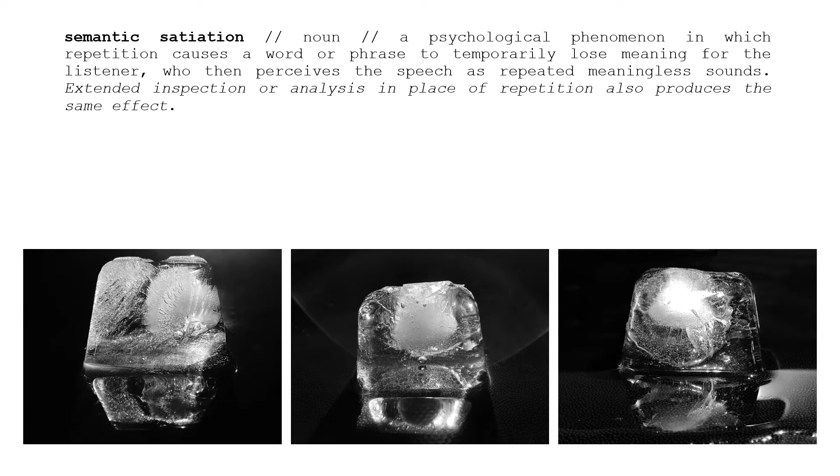Semantic satiation is essentially the repetition of a word which causes it to lose meaning to the listener. This also applies to extended inspection or analysis of an object. The definition says it becomes a meaningless sound or object, but for our purposes, I disagree. I believe semantic satiation is the key to discovering new meaning within the familiar.

Water is essential, the key to sustaining life. Yet in our everyday lives, it is severely underappreciated, treated as a nuisance, relegated to the gutters. What if we celebrated it instead? The goal of this proposal is to completely reframe our perception of water through design by making it the centerpiece of our everyday experience. Through acts of semantic satiation, ubiquitous encounters at both urban and domestic scales, the function and beauty of water are simultaneously harnessed and elevated.

Water is known by the ways it is shed and through artful acts of collection.

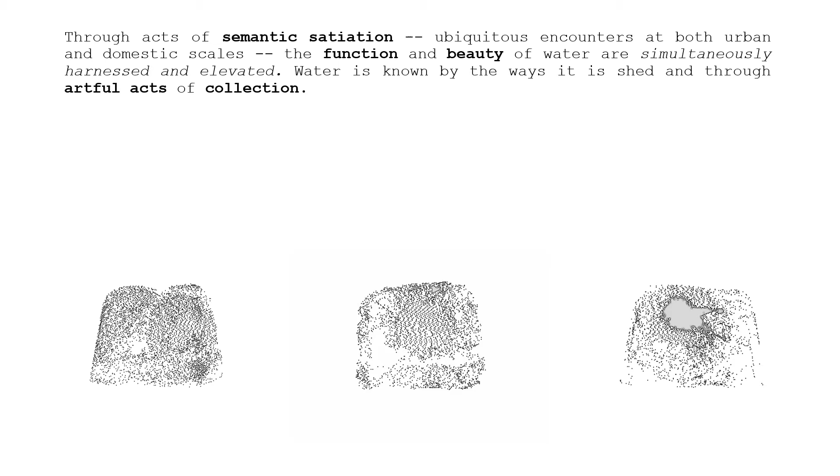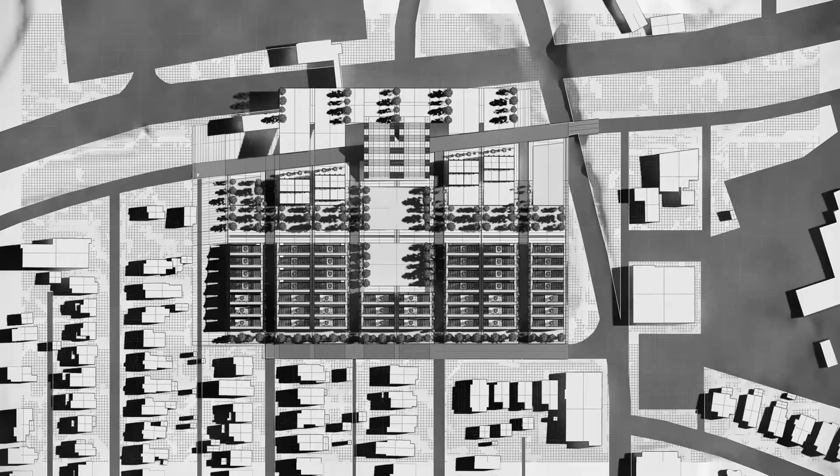Our site is located slightly east of Atlanta, Georgia, on the outskirts of Decatur within the parking lot for the East Lake MARTA station. The organization of this site plan and everything in the project from here on out is entirely based upon the previously existing site and the current existing surroundings. Straightening that curved road was the first step in restoring the urban grid.

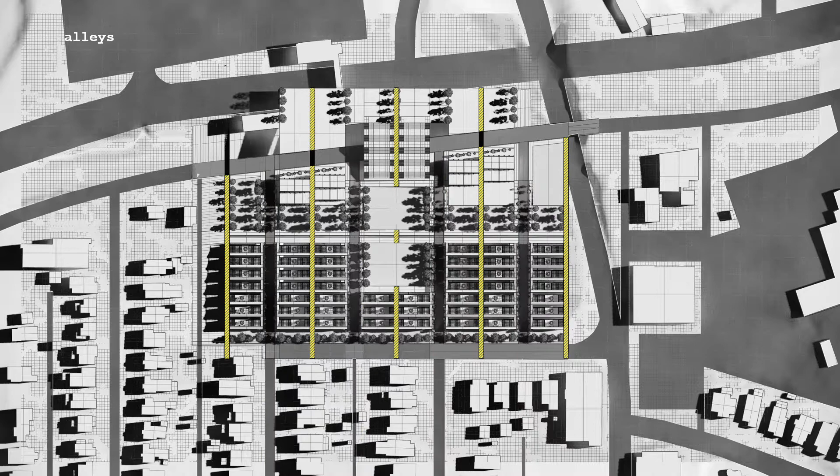This is College Avenue and runs parallel to the MARTA track. The road placements were formed by extending the existing roads and alleys within the southern residential space up into the site. This directly connects both the site proper and the surrounding area to the MARTA station. Pedestrian alleys were added in between because the housing will be denser within the site than the surrounding neighborhood.

A natural dip in the topography initiates a canal or valley to collect water for the public space. The newly straightened Park Place becomes the southern border of all the interventions. Altogether, you can see how the entire proposal conforms to its surrounds, restores the grid, and becomes its own unique logic in the process. This organization strategy will control the housing placement, road and alley systems, and most importantly, water collection strategies.

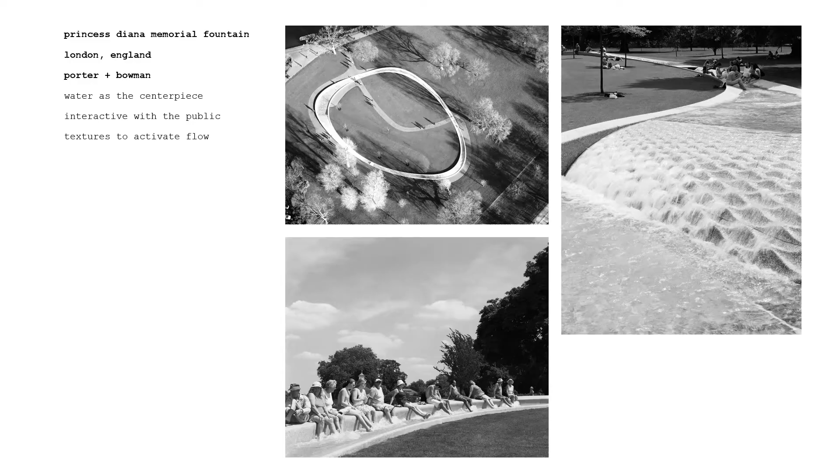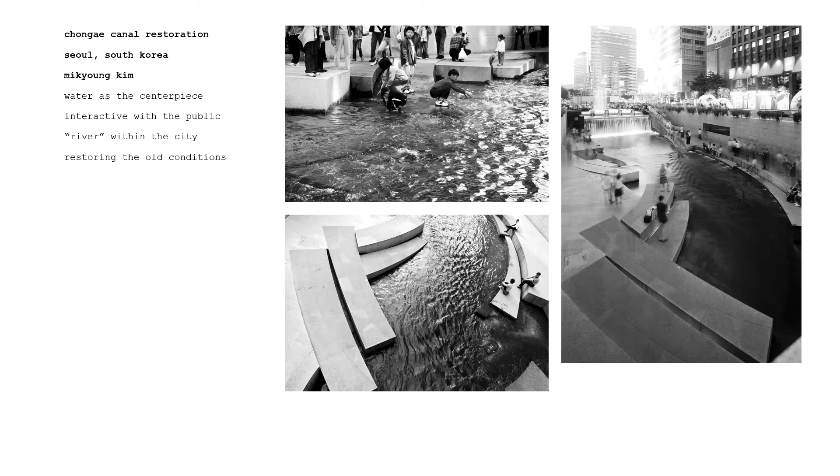On the topic of water, these two precedents have inspired the design strategies in this proposal. This is the Princess Diana Memorial Fountain. It uses water as the centerpiece, it's interactive with the public, and it uses textures to activate flow. This is the Chongae Canal Restoration Project. It also uses water as the centerpiece, it's interactive with the public, and it restores the city to its previous river conditions.

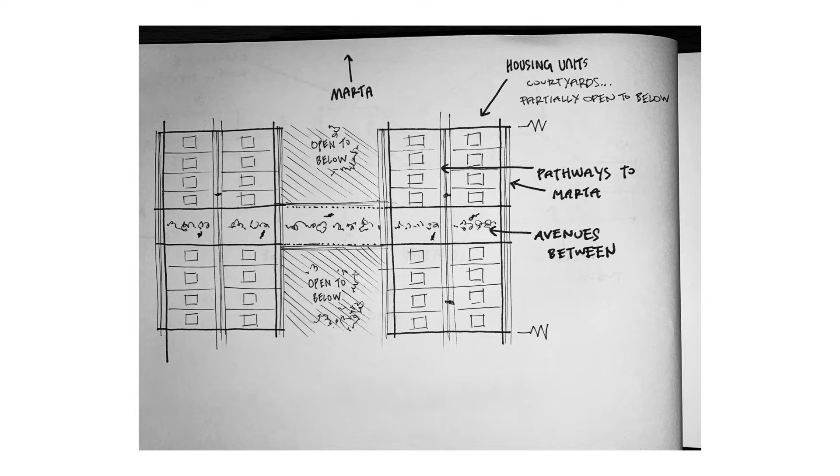Taking the design into 3 dimensions at an early stage was critical to developing a meaningful and consistent water collection strategy for the public space. From the beginning, there was an interesting interaction between north-south regulating alleys and east-west water collection valleys. The trick was to harness both of these forces in a cohesive way. This series of diagrams explains how the organization was brought into 3 dimensions.

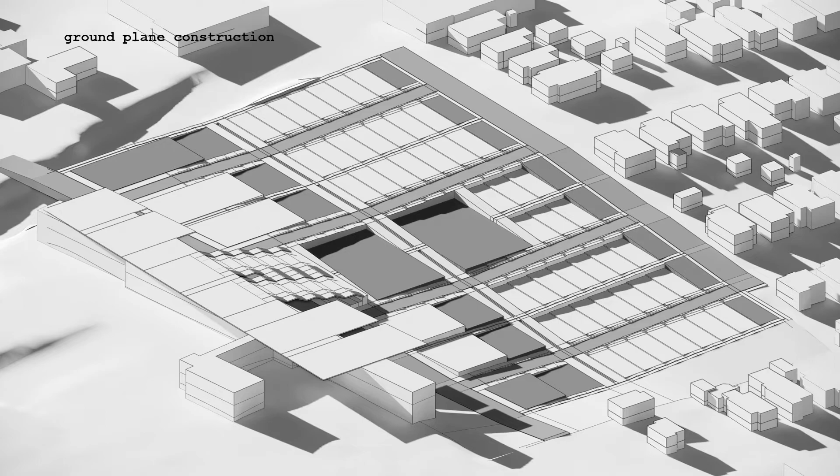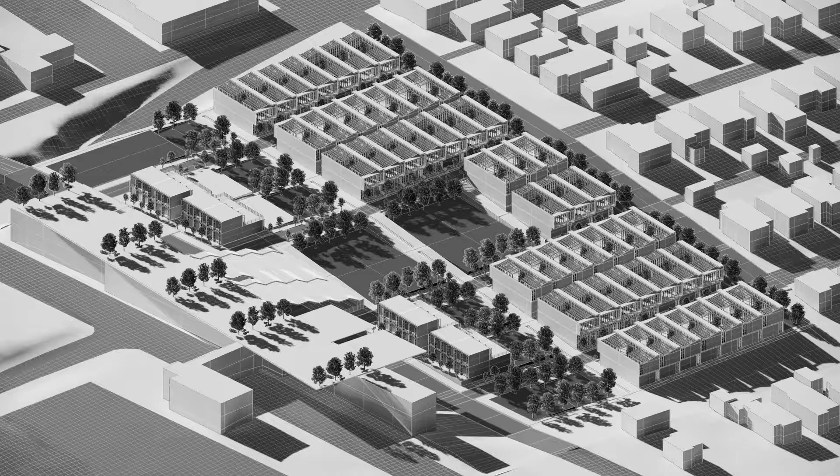And here's the site with the housing from a northwestern vantage point. Energy will be produced for each respective part of the site, the MARTA station, the shops, and the housing, from the solar panels on their own roofs.

Notice the green space is located along the central valley. The housing is located on the southern part of the site, directly adjacent to the surrounding neighborhoods. The housing with attached shops are placed closer to the public space and to the MARTA station.

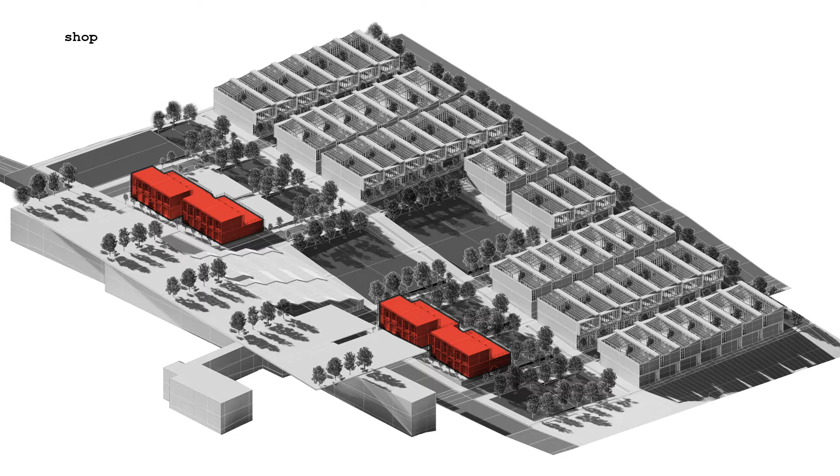These are the main shops, located along the roadway, College Avenue, and closest to the MARTA station. This is the performance space with a stage and slope seating extending over College Avenue. This could be used for things like concerts or sports events. On a terrace above the MARTA station, there will be courts for basketball or tennis.

Below the final water collection point will be a cistern, and this water will be showcased with a series of fountains and a splash pad.

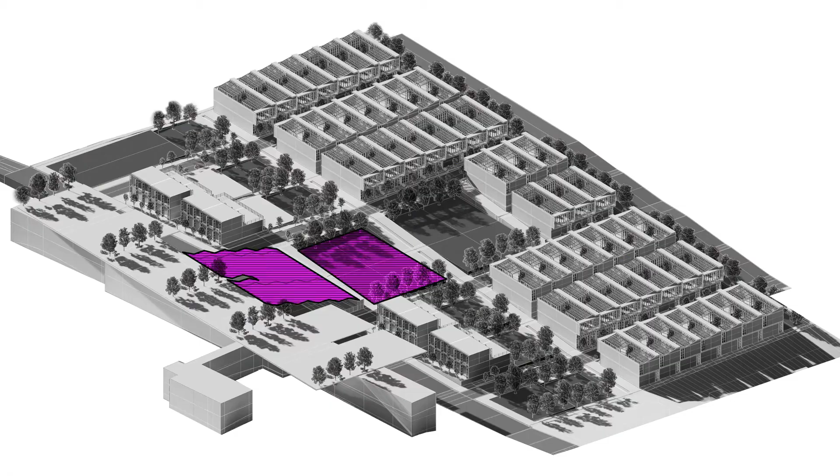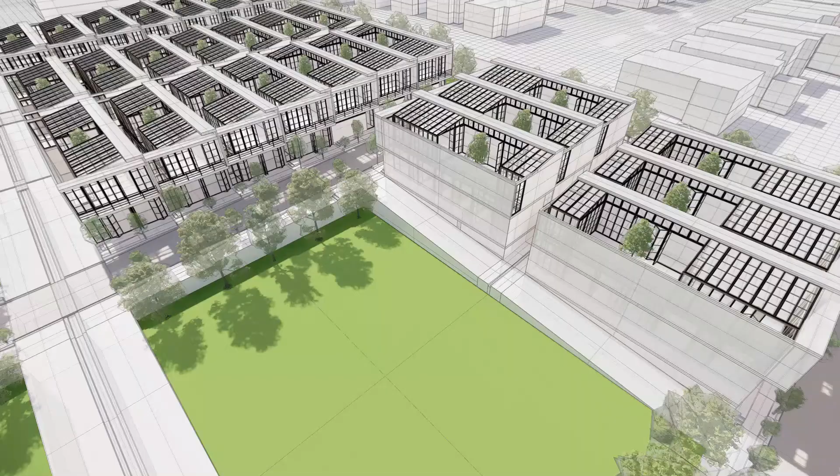Here's a view of the main green space overlooking the housing units. This view shows the stage, the seating, the access point for MARTA, and the terrace atop the train station. The water is activated by spilling off the edges of this terrace in an artful way, similar to that of the housing units. Here's an eye-level view on College Avenue, showing the covered bus stop and the shop fronts.

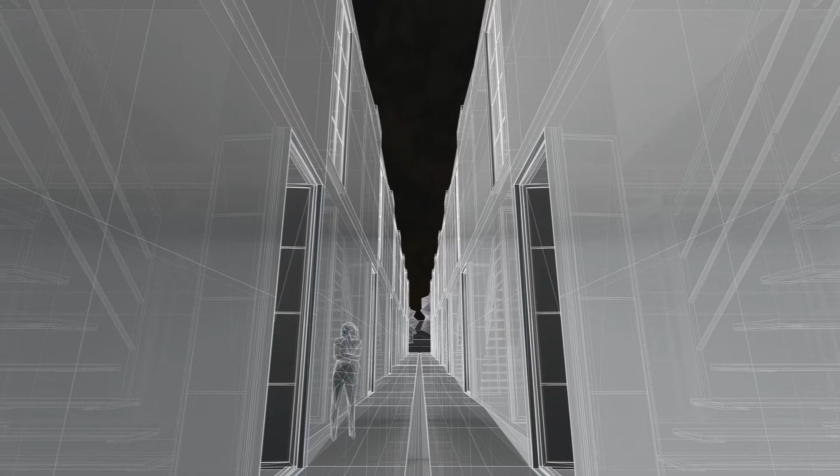This is the water showcase area, looking at the housing patterning. This view is looking down one of the alleys, which is where all the units have their main entrance, separate from the attached shops on the opposite end. Notice the channel for the water down the center of this alley.

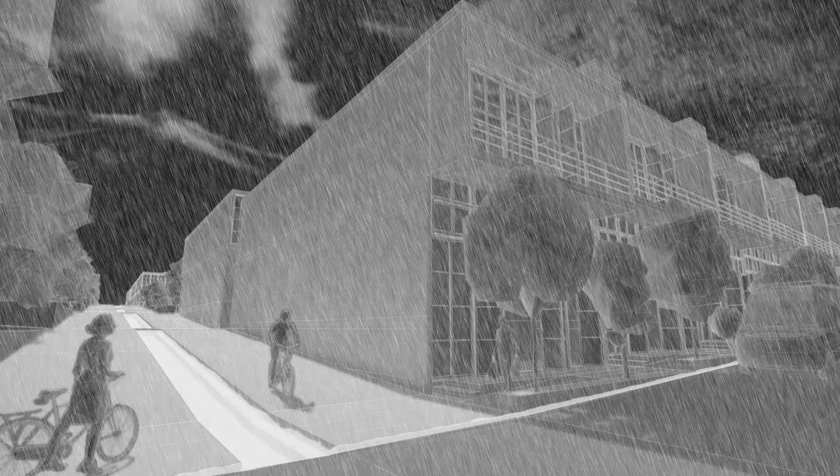This shows the corner of a street and the pedestrian canal space. The urban space is all activated by the water when it rains.

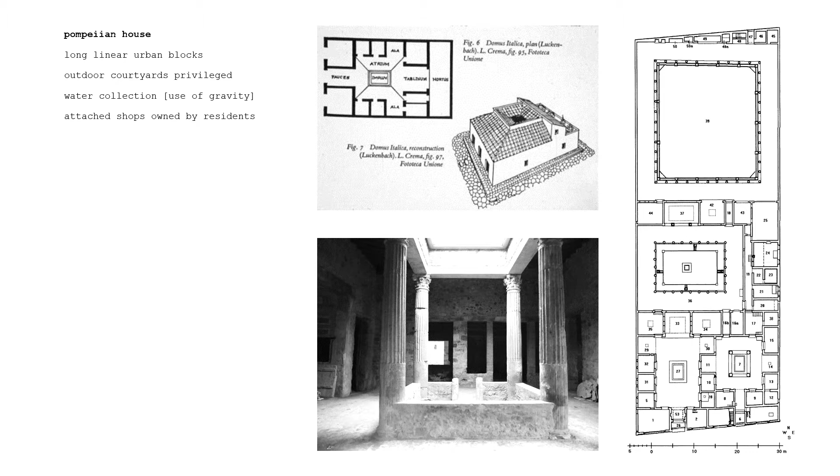As we move into the individual unit design, notice the alignment of the shop fronts along the public realm, all attached to their respective private units. The Pompeian house was a critical precedent because of its long linear blocks, outdoor courtyards, water collection, and attached shops.

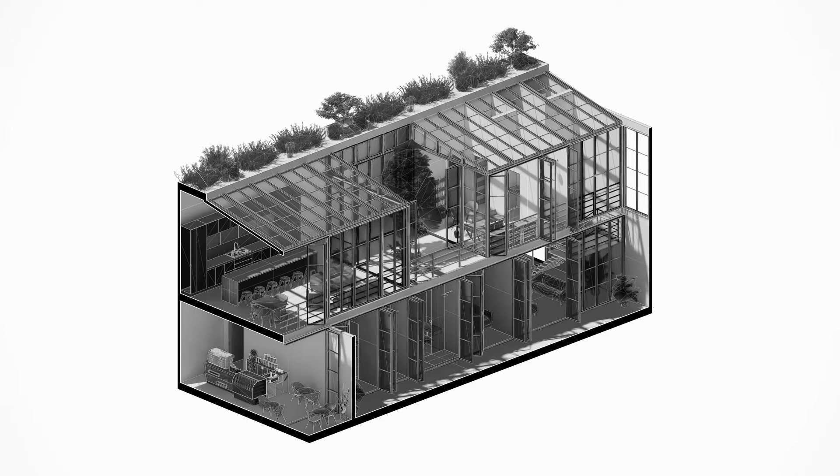This is a series of isometric sections. This first one is cut through the shop on the bottom floor and the main living and kitchen area on the upper floor. This is cut through the upper courtyard and the bedroom and bathroom spaces on the lower level. This third ISO is cut through the den on the bottom level and a bathroom on the top level.

This section is looking directly toward the linear water collection space. Some other things to note are the location of that shop on the left of the bottom floor, the bedrooms in the middle, and then the den, and just like in the plan, we have the kitchen and the living room on the left, courtyard in the middle, bedroom and stairs on the right.

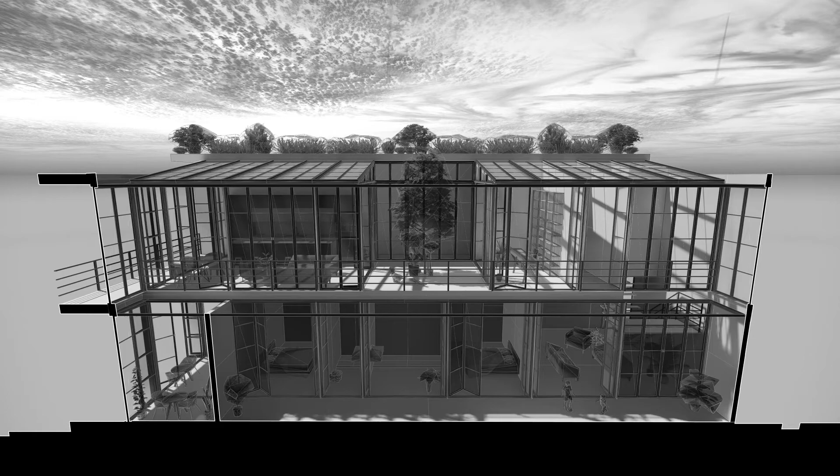This is a view from within the shop space, and this is that same view activated by the water collection.

This is the second of the 2 versions of the floor plan. It has no shop, 3 bedrooms, 2.5 bathrooms, a large courtyard on the upper level, and again 3,000 square feet total. With the exclusion of the shop, the 3rd bedroom can now go on the bottom floor, which extends the square footage of the courtyard on the top level.

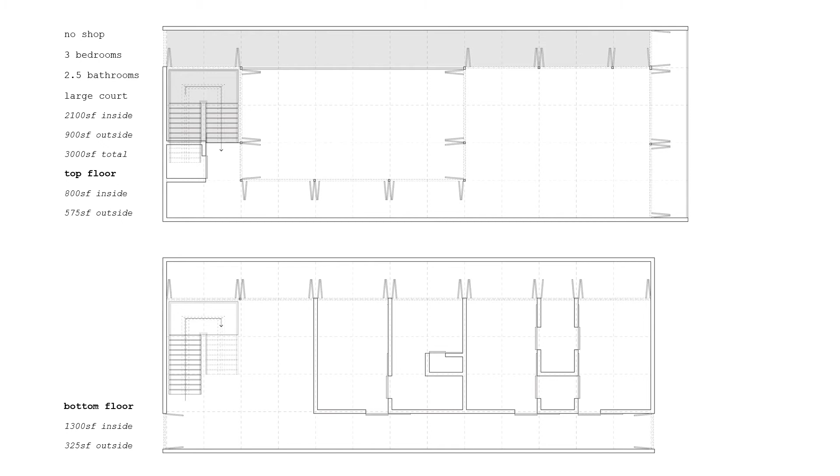This is another isometric series. This first is cut through the kitchen, living room, and a bedroom on the bottom floor. The second is cut through the courtyard on the upper level and the bedroom spaces on the bottom. This last one is cut through the courtyard again on the upper level and the den on the lower.

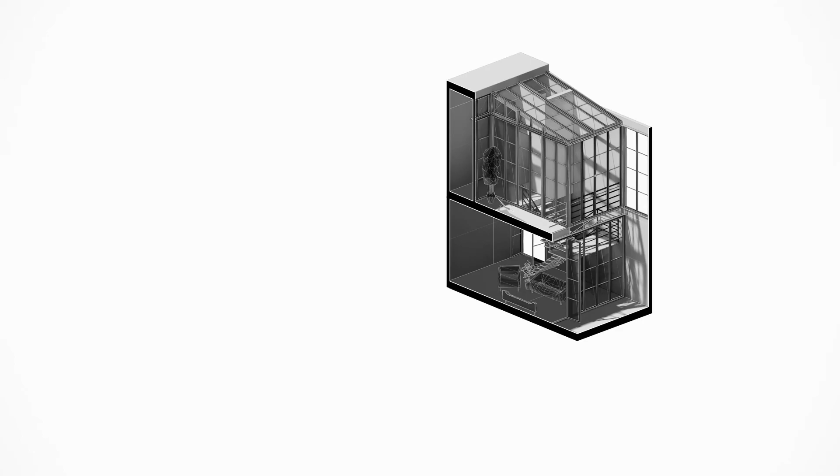This is a view of the main bedroom and bathroom. And here's the same view again.

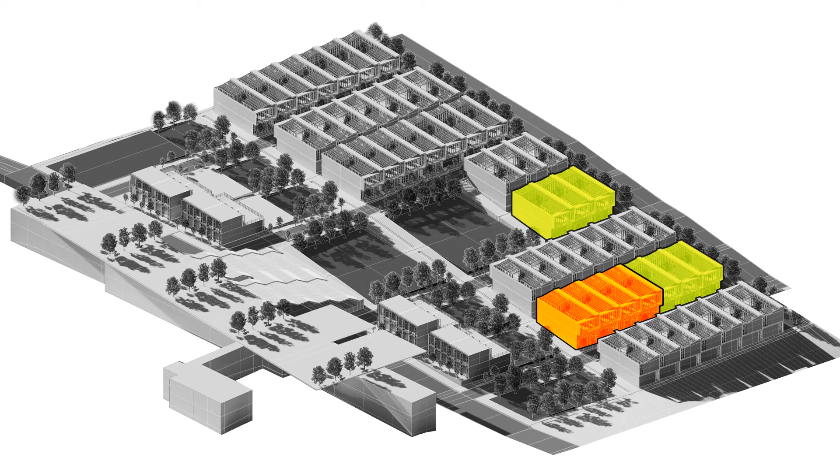And this is where this variation is located on the site, the yellow being the strictly housing units and the orange being the housing with the shops.

And these are located on the ends of the housing blocks for ease of access.